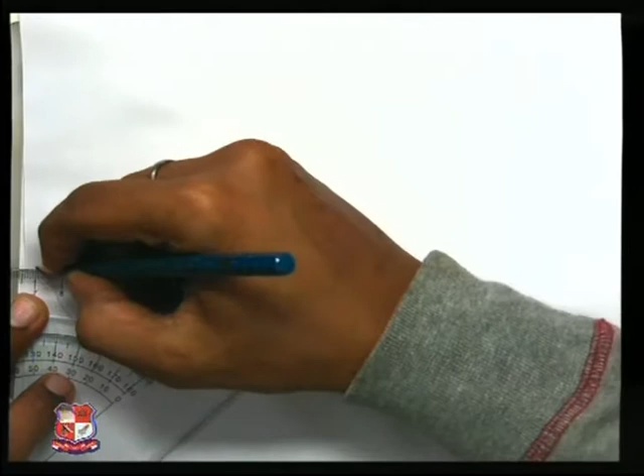Now we'll see how we can utilize this 60 mm diameter circle, and we need to take this 60 mm circle as if it is revolving for one revolution. So first of all we will need to take the center line for the same. Take the center line first of all.

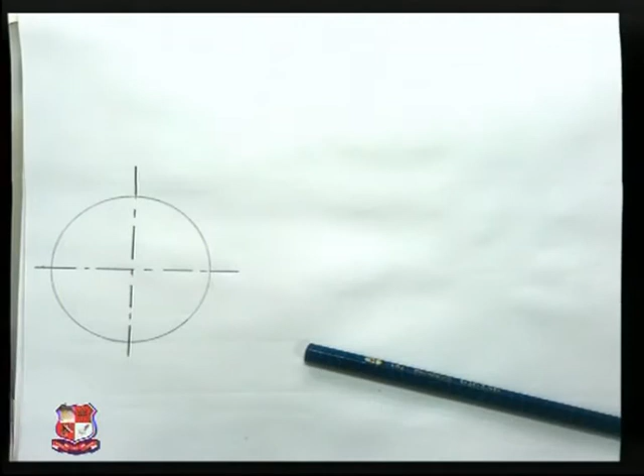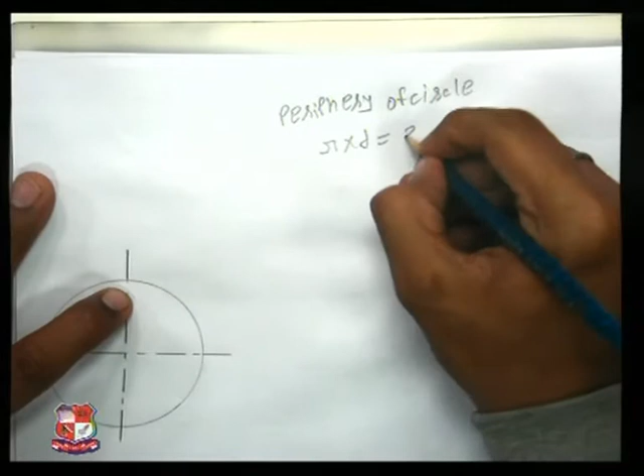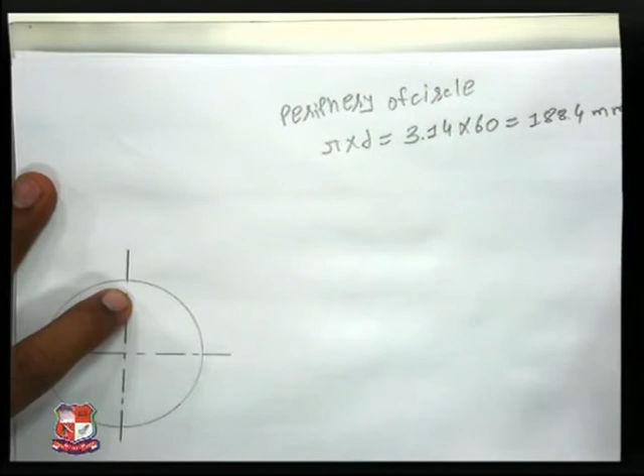Now what would be the periphery of a circle? Periphery of the circle, if you see, is pi into d, where pi is equal to 3.14, d is equal to 60, which means that the answer is 188.4 mm. It is the periphery of the circle.

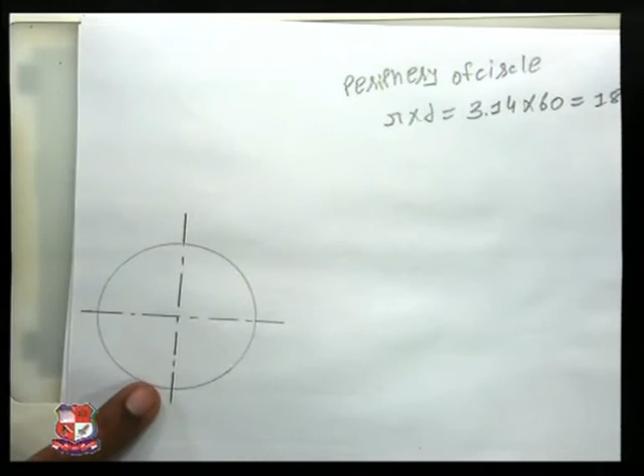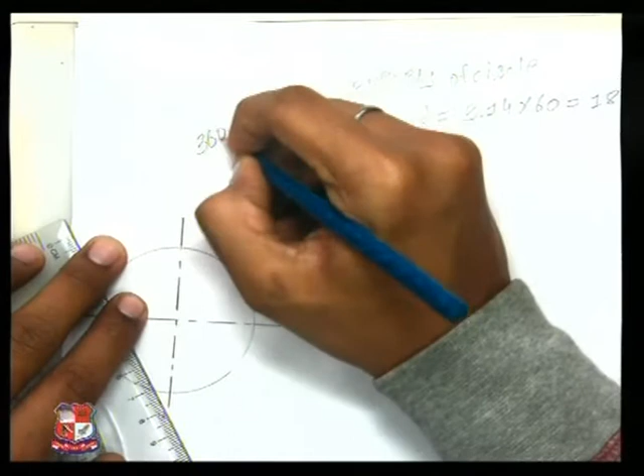Now we will see where it can be utilized. First of all, we need to take this circle revolved for one revolution. We need to divide this circle into 12 equal parts. So 360 divided by 12 is equal to 30 degrees. We will divide this circle into 12 equal parts.

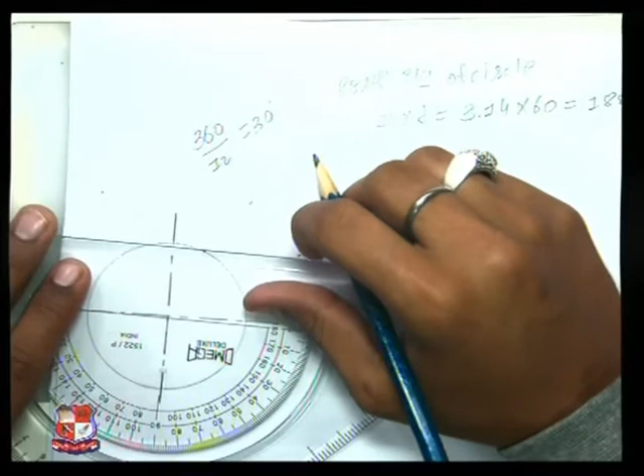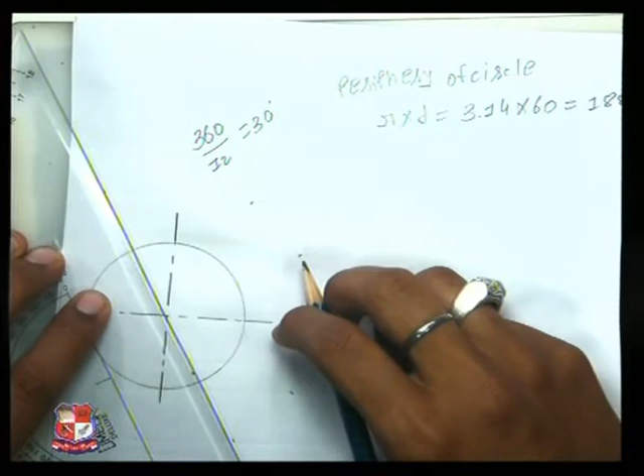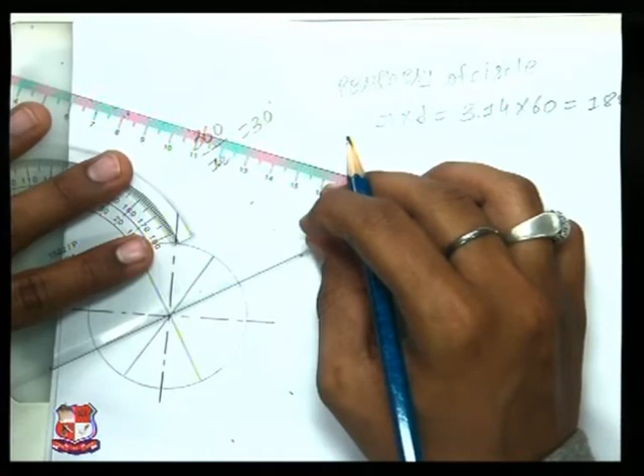Draw very light lines, or else you will feel that you are trapped between a number of lines. Draw very light lines, and always make a habit to draw very smooth curves as well. Now we have got these 12 equal parts.

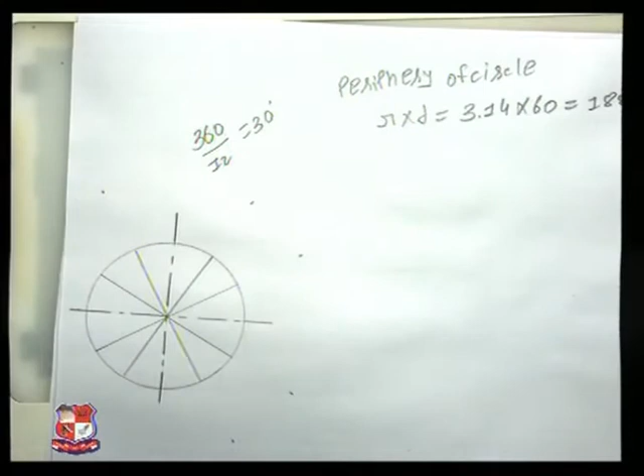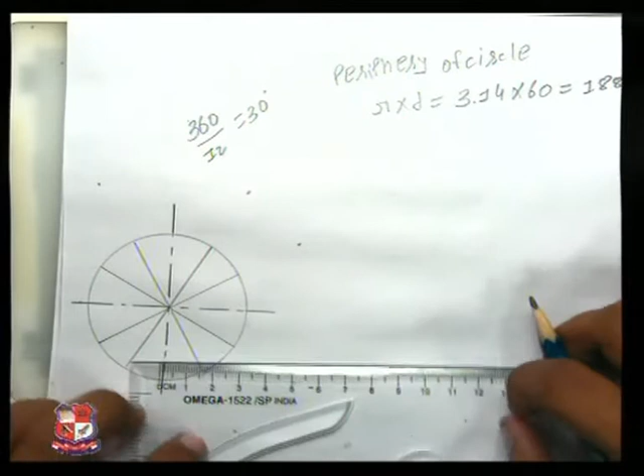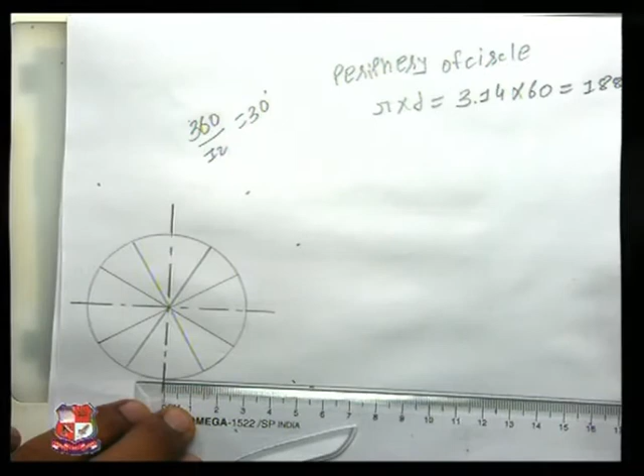Now here comes the periphery. Periphery length is given as 188.4. So from the bottommost point we will take a perpendicular line of 188.4, which would be a complete one revolution. If a circle is revolving for one revolution, then it will travel this much distance. It will travel this much distance.

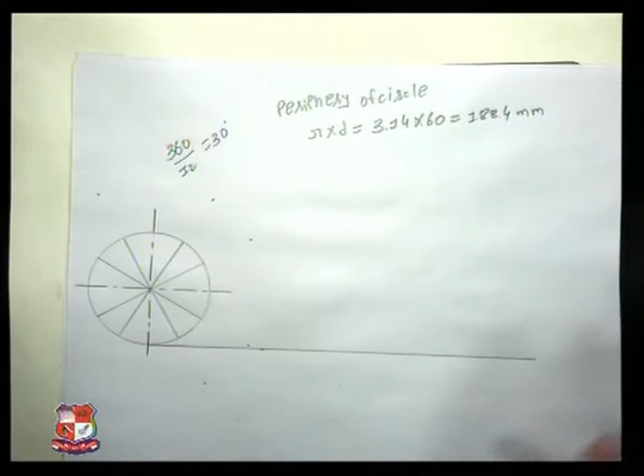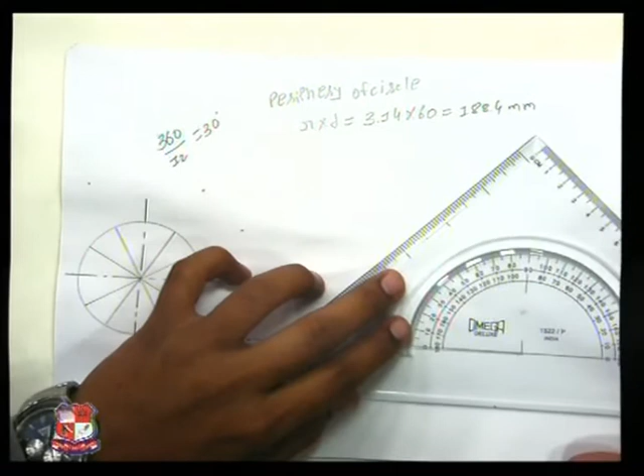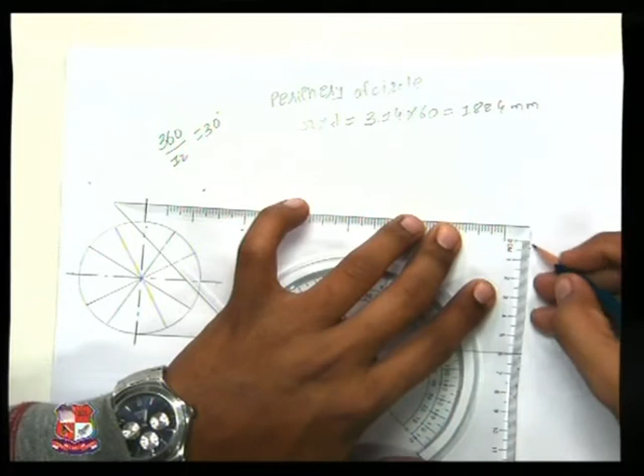Now from that point itself, draw a line at 60 mm so that it can be perfectly perpendicular to this line.

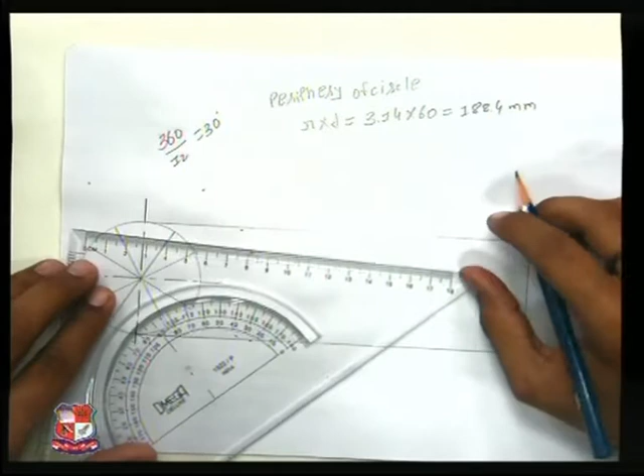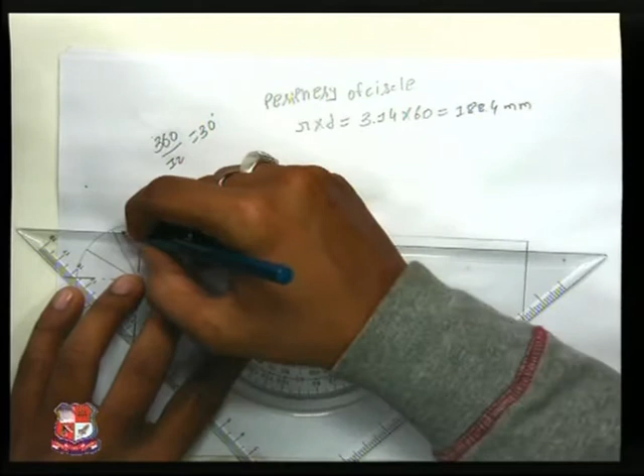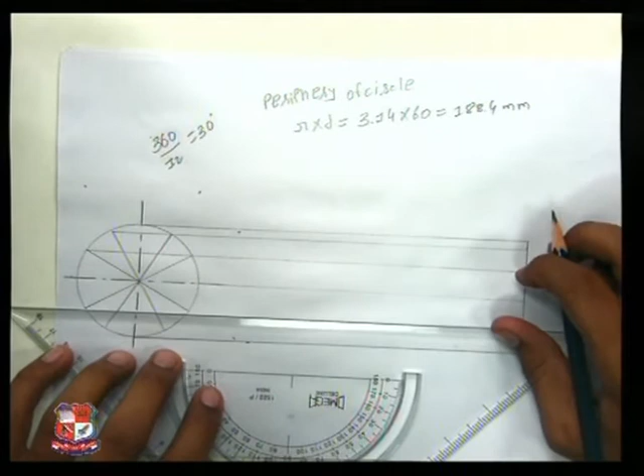Now draw lines touching this portion, very light ones. From each part draw the line. So when you are passing through the parts, you will feel that two parts would be intersecting with each other. Likewise, I have taken all the projections towards this line.

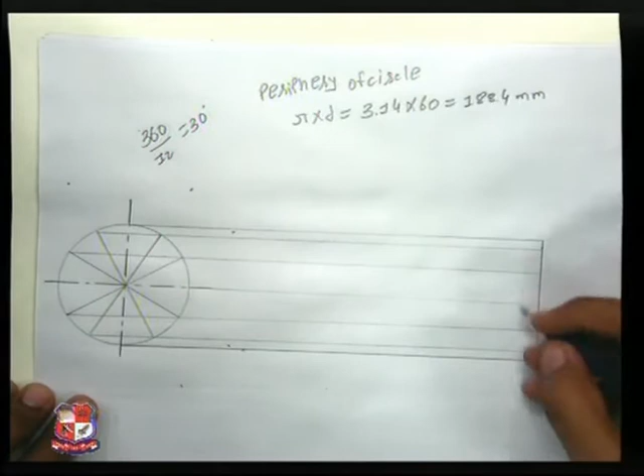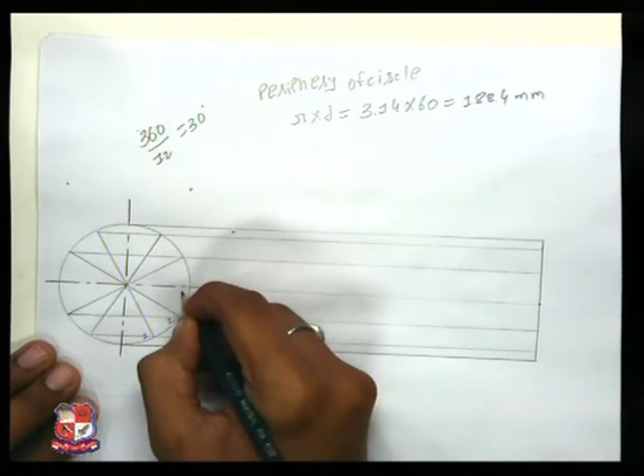Now when this circle completes the full revolution, it will reach over here, and we have taken all its projections. Now let's name the circle as 1, 2, 3 till 12.

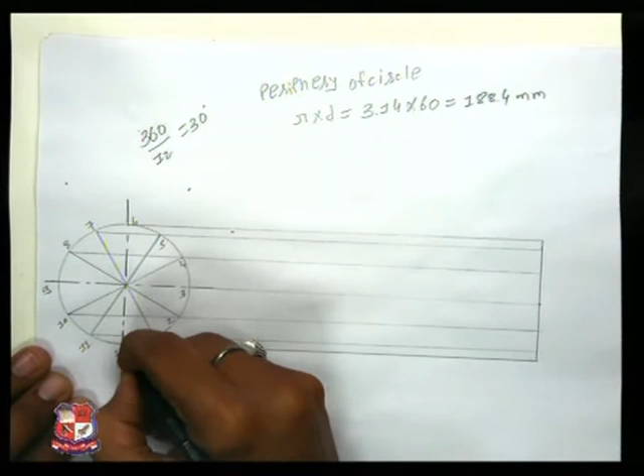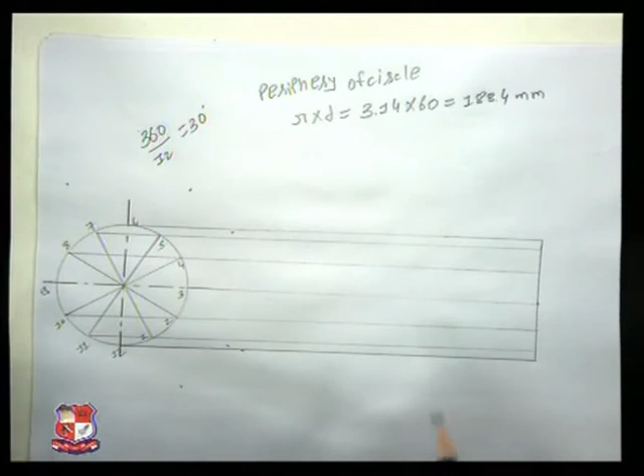Now for each part, the center will shift, so we need to divide this 188.4 line into 12 equal parts. It is not very easy to divide this sort of line, so we will use this system to divide a line. Draw a line of 12 centimeters or 120 mm at any angle.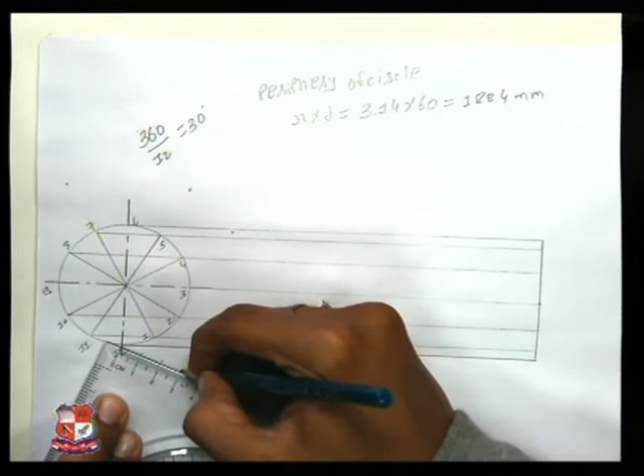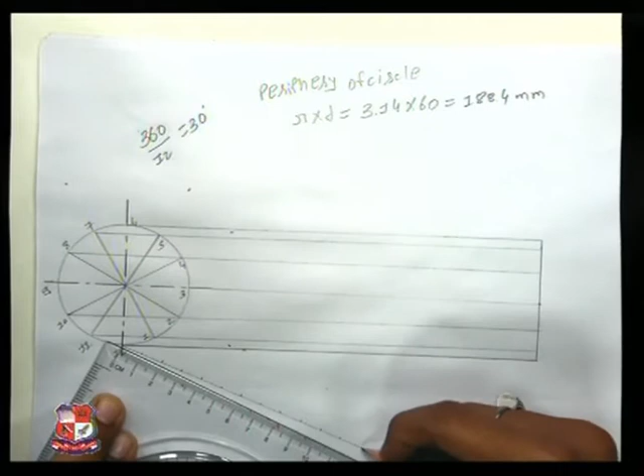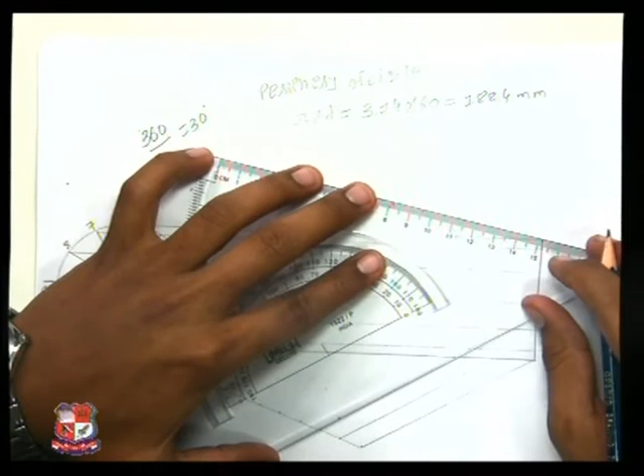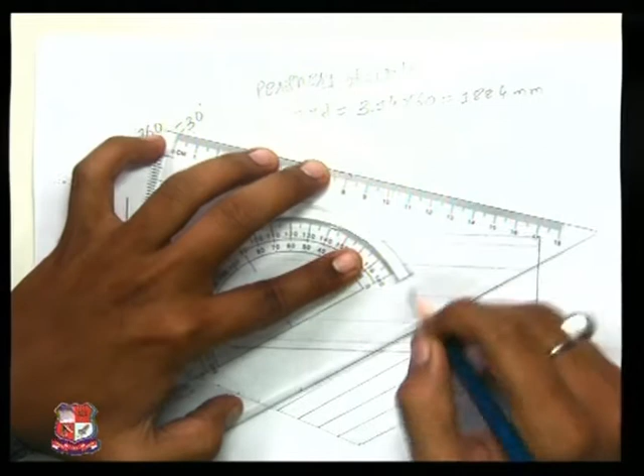Divide that line into equal parts. As we need to divide this line into 12 equal parts, I am dividing this line into portions of 10 mm each. Join the open end with this. Take parallel lines. Take parallel lines to these portions. Make sure that all lines are parallel and your equal divisions will be achieved very properly.

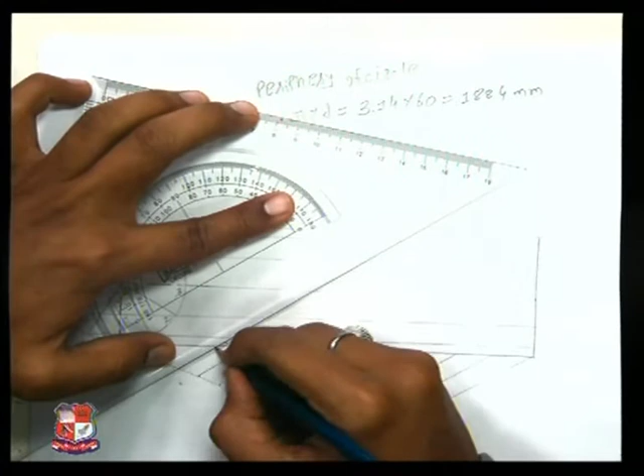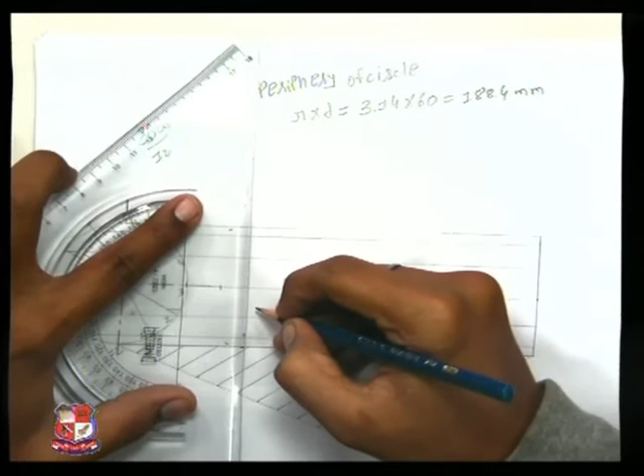All parallel lines I have taken. Now take perpendicular line from this, just mark the point. This is the center shifting by part. It is the representation of this only.

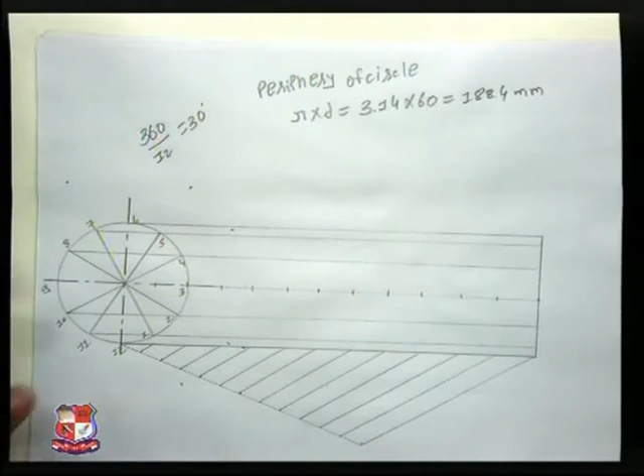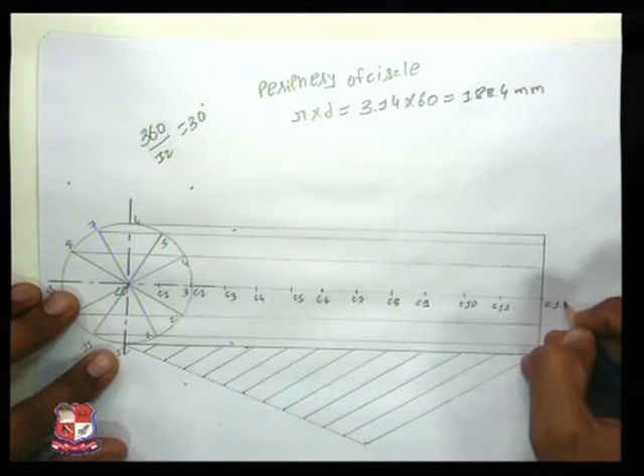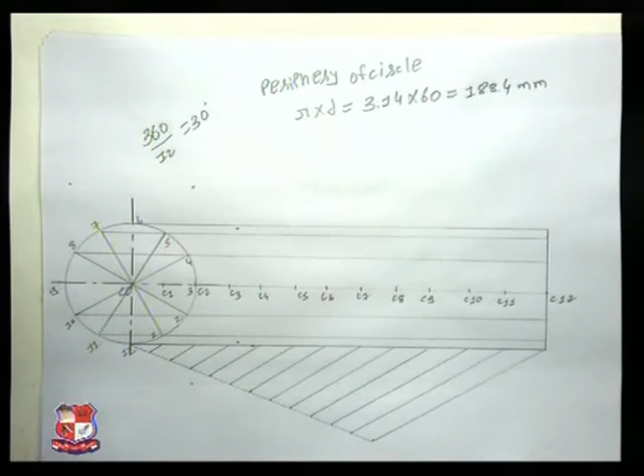If we considered this portion as C0, then it would be C1, C2, C3, C4, so on till C12. I'm again saying that this is a very tedious process. Please look at it very carefully, or else you cannot understand how you can trace the cycloid. Now we need to trace this cycloid for a diameter of 60 mm. So I am taking this radius.

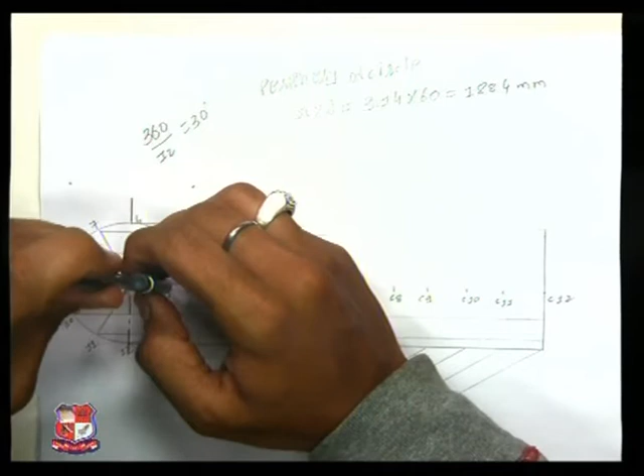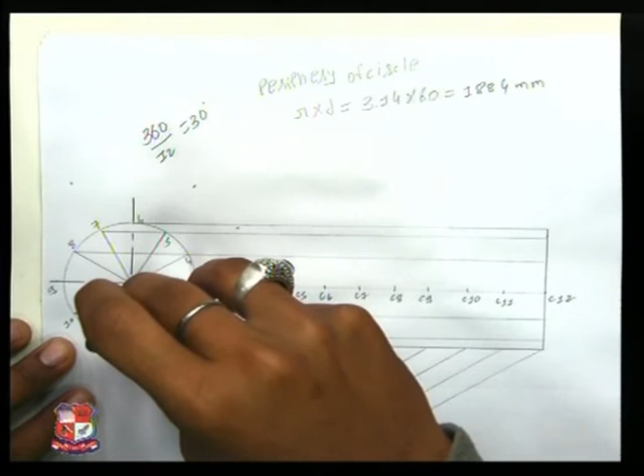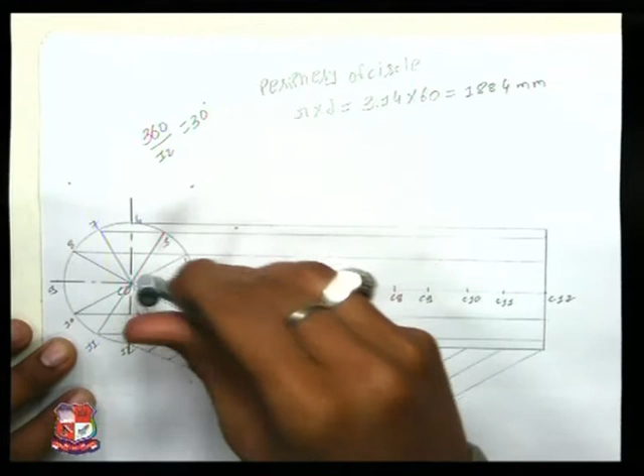When I am taking the center C1, I am marking an arc on line 1, taking again radius as same, C2, marking an arc on second line, taking center as C3, again radius same 30 mm, marking an arc on third line, C4 same arc on fourth line, C5 arc on fifth line.

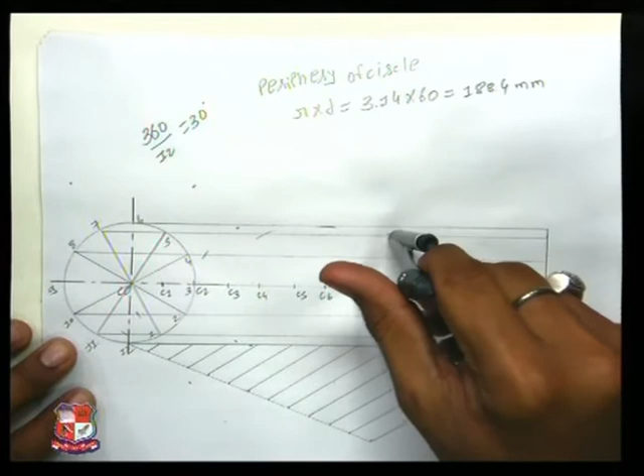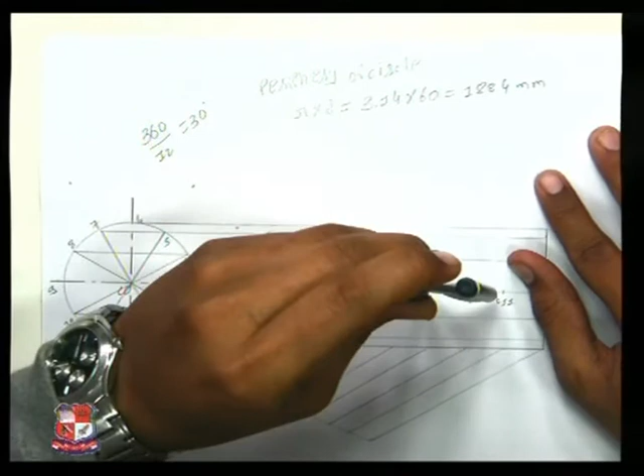C6. When you come to C6, the arc would be completely tangent, as it would be a radius itself. C7 will be going down again, C8, again C9, go down once more, C10 would be on the 10 line, C11 would be this portion. So we have got various arcs, taking C1 to C12 as center, radius as 30 mm.

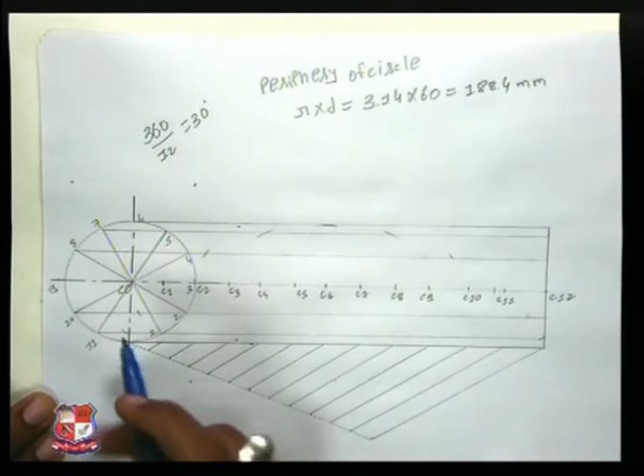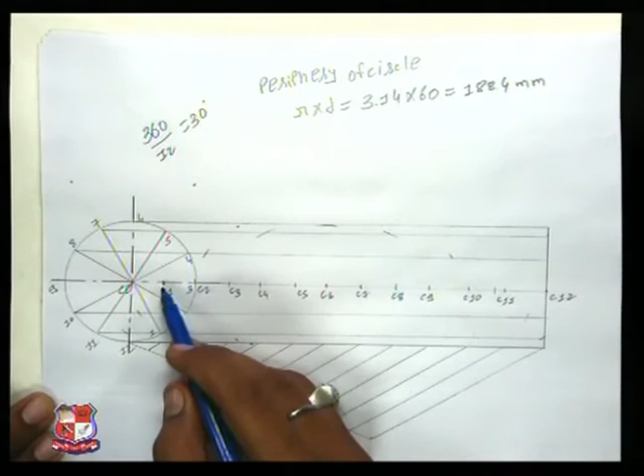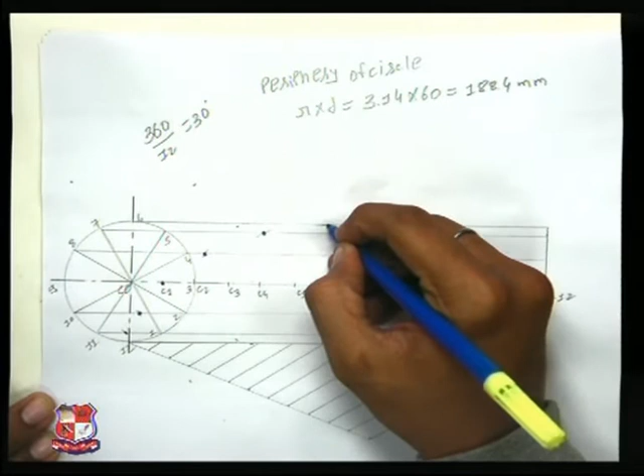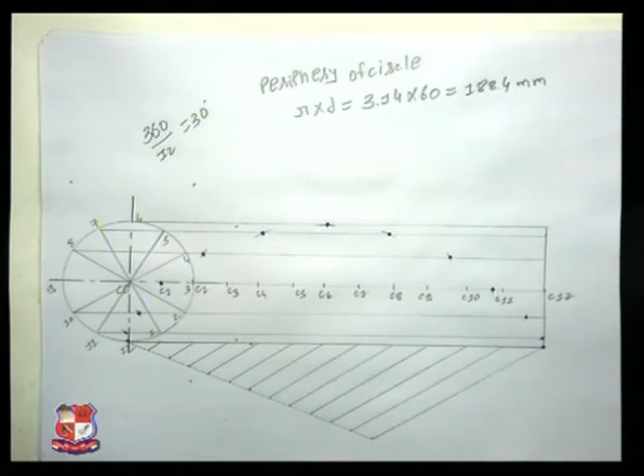Plotted arc according to the center, C1, then arc on the 1 line, C2, then arc on the 2 line, C3, then arc on the 3 line, C4, arc on the 4 line, and so on till the 12. We have got the various arcs. By joining it, we can get our desired cycloid. We can either join by French curve or manually.

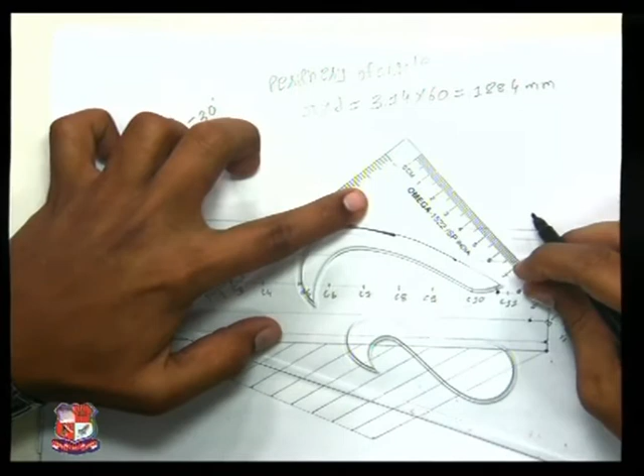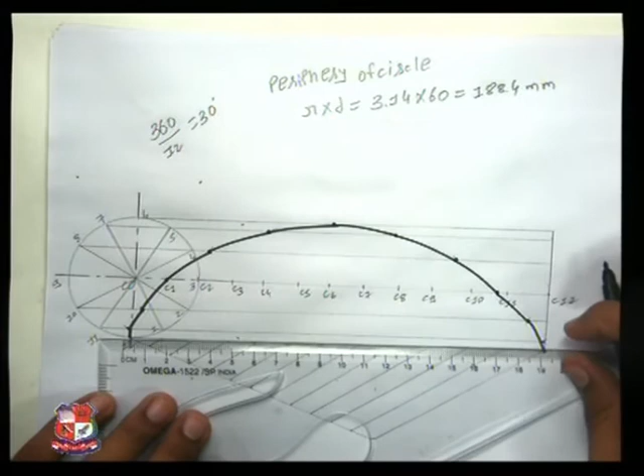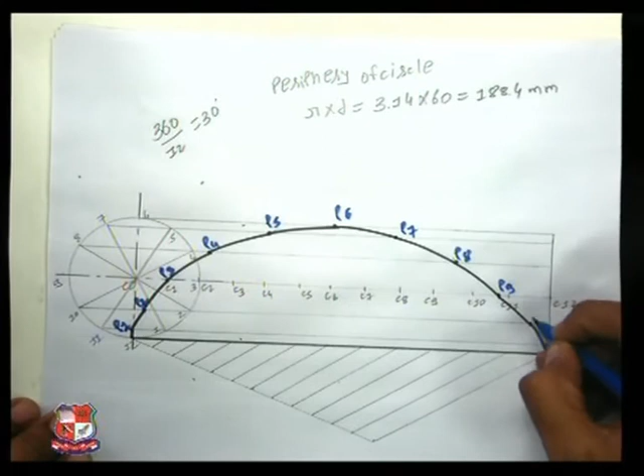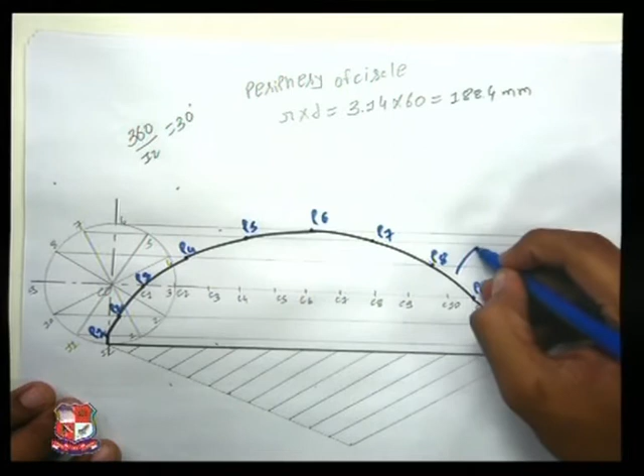Join one by one. Join the bottom periphery line also. So this is how you can trace your cycloid. Don't forget to name the points which you have taken, P1 to P12. Don't forget to name the curve as well. It is called cycloid. Even give the dimension of this pi into d.

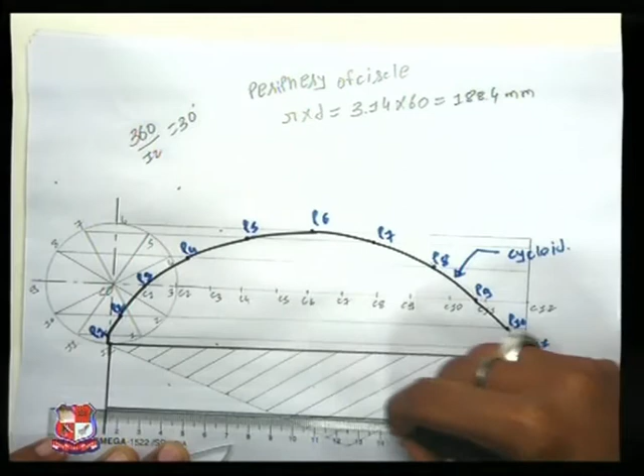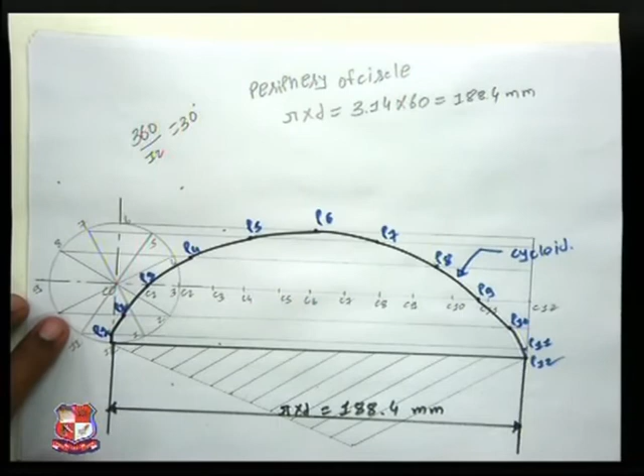Right, like this, pi into d is equal to 188.4 mm. So this is how you can trace your cycloid. Let's take a quick look at how we can draw the cycloid. Cycloid means the curve traced by a point on a circle following its one revolution. First of all, we will draw a circle of diameter 60. Divide it into 12 equal parts. After dividing into 12 equal parts, from the bottom point, we will draw a periphery line.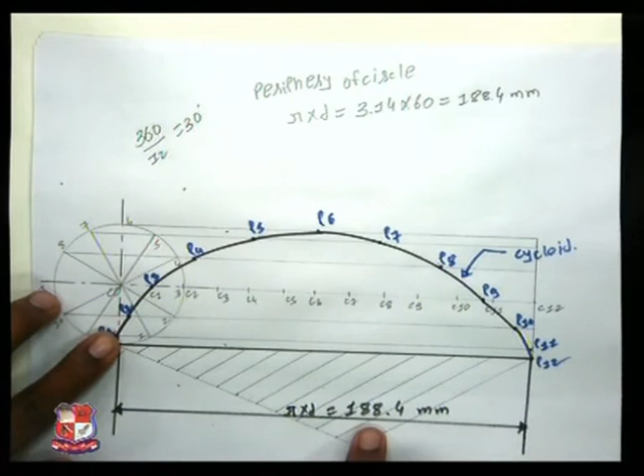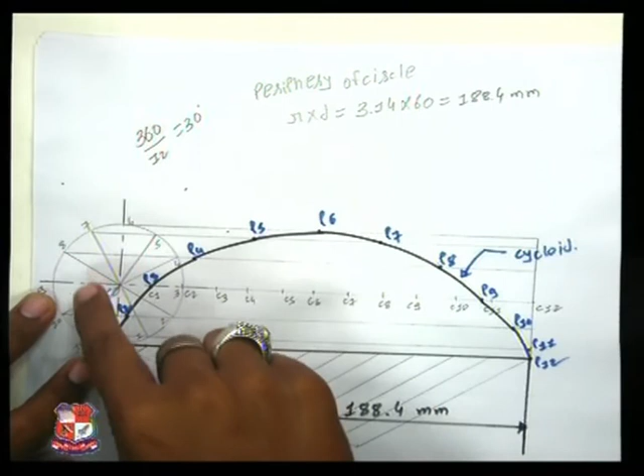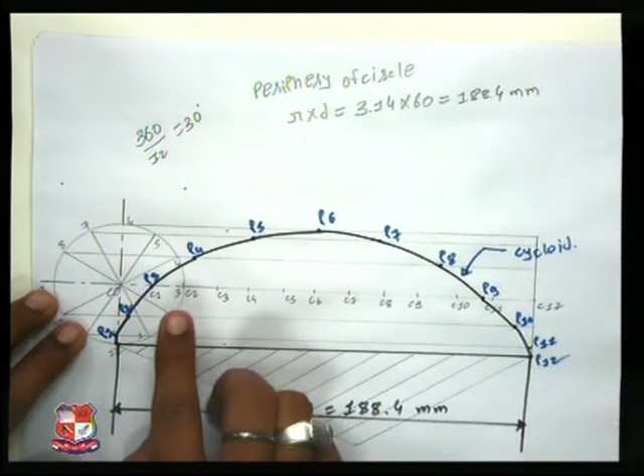What would be the periphery? Pi into d, which means that over here it would come around 188.4 mm. We have drawn 188.4 mm line. Now we have divided this circle into 12 equal parts, which means that each part will be rotating one by one. So we have given the name 1 to 12. Dividing this pi into d line into 12 equal parts, we will get our 12 centers, C1 to C12. We have got the 12 centers, we have got the radius of the circle.

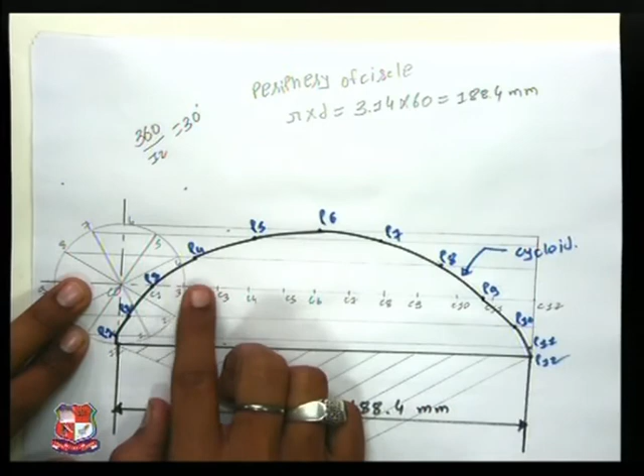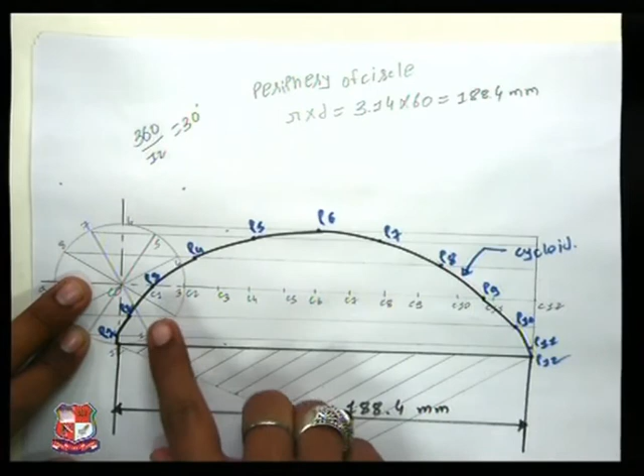Now we need to take out the arc. Our circle diameter is 60 mm, which means that we need to take the radius of 30, taking C1 as center, putting an arc on the one line, and so on. C2, arc on 2 line. When you come to C6, the arc would be properly tangent. Then again go downward till C12. Join this arc with a smooth curve, either using French curve or manually. Name the point, give the name to the curve, give the proper dimension, and this is how you can draw a cycloid.